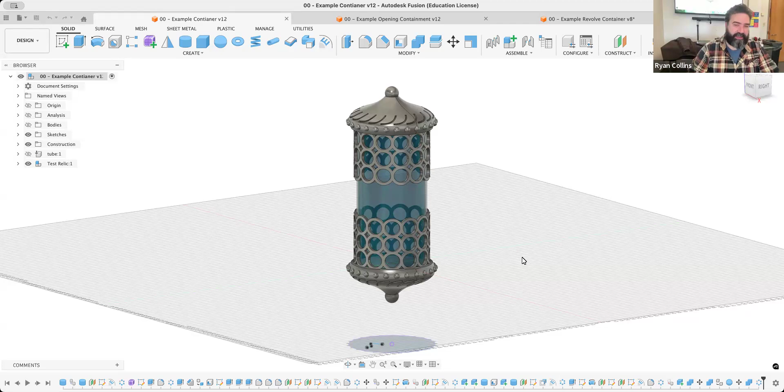And the trick is we want them to 3D print as functional objects, both as there will be some kind of a moving component to this, but also your printed version has to interlock with the provided actual bit of acrylic tube. And one of the main things that comes into play is clearances.

We talked a little bit about it before, but the difference between, say, modeling something and then machining it with actual cutting tools, like machining something with a lathe, a mill, whatever, some sort of actual metal machining, you can actually keep extremely high tolerances. You can also kind of let it slack, but you can keep very high tolerances.

When it comes to 3D printing, yes, you can also do that too, but there's things to be aware of and compensate for. The main thing is when you're 3D printing with a filament printer, as we're going to be printing the bulk of these, it takes your model and what's called extruding it. It extrudes it because the actual printing head basically is like a hot glue gun that's on a computer controlled arm.

So what happens when you use hot glue and you try to run it down on a piece of paper or something like that? It's not like it stays exactly put. It kind of squishes down. And that's exactly what happens with 3D printing.

So you cannot keep a 0.05 millimeter tolerance with a 3D printer, at least a filament printer. I say this because there are others, of course, the resin printers can be much higher toleranced. But you have to compensate for some things. And essentially, all you have to do is just open up your container a little bit, usually in the range of at least 0.1 or 0.15 millimeters spacing. And that's just to help give a little bit more.

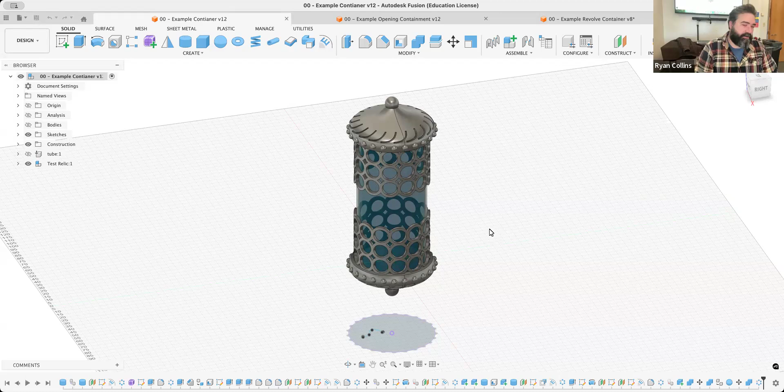Now, at most, depending on the fidelity of your printer, 0.5 is a lot to give extra spacing, but it's not unheard of. The ones we're using are pretty well dialed in, but what I mean by that is, all right, something like this. We have our acrylic tube designed, and we took proper dimensions for this, and we know that is exactly the size of the acrylic tube. That is already made. That is something we can count on.

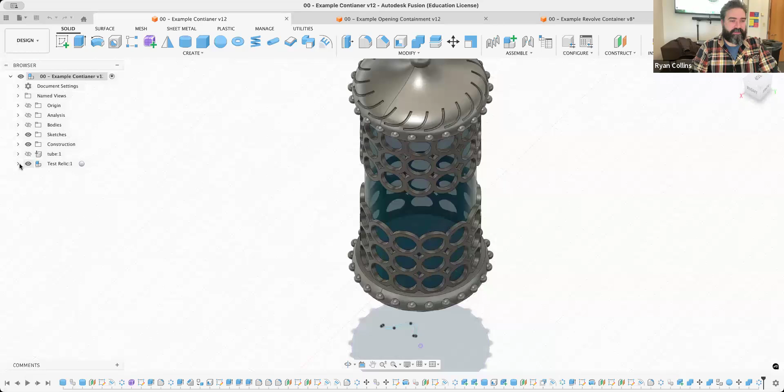But how does that work in here? Now, with this model, what we did is, I'll just hide one of the parts here, we modeled these rings and things directly off of this cylinder. So that means it would be an exact fit. Great, except we have to account for that little bit of squish that occurs. So what that means is I need to essentially just widen this area a smidge.

So to double check, what is the diameter of our tube here? It's right on 50 millimeters. Okay. Now, again, we were getting some pretty exacting, but you never know. Sometimes upwards of even half a millimeter size difference, because the acrylic tubing is not designed for machine tolerances. It's designed for plug and play tubing. The tubes we're using are actually built for dust collection things, so it will plug into PVC pipes and things like that.

So it's not meant to be ultra high tolerance, because the glues that are used take up some space and then they kind of fuse the materials together. Yada, yada, yada. Material science. Don't really need to get into that. But okay, well, I built this design directly off of this tube. How would I compensate for that?

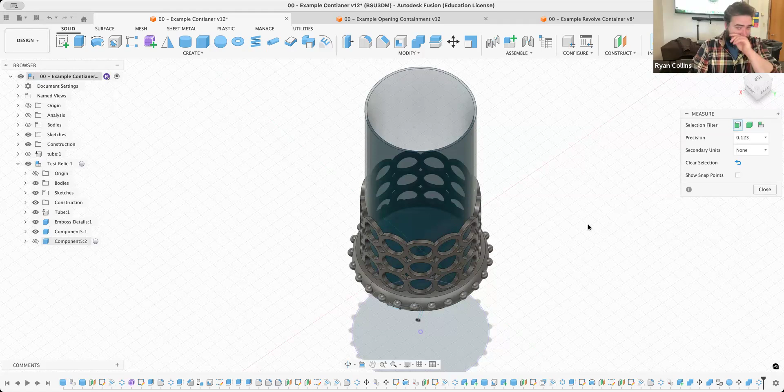Well, there's a few different ways. One, if you're building something, you can just intentionally build something a little bit larger, add in that little bit. But with something like this, I need to actually have a teeny bit of a gap between the wall of this acrylic tube and the wall of this model. And right now I've modeled them as exacting. Okay, well, that's actually pretty easy to fix.

All we have to do on this one is, well, if I already used an extrude to cut this whole thing away, why not just do exactly that? So what we can do from here is a simple additional cylinder.

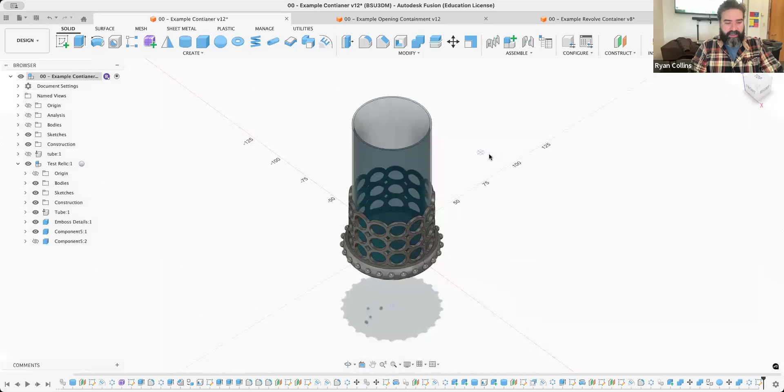Maybe here. Actually, probably would have worked better up top, so let me cancel that. Additional cylinder. We'll use this top edge of the tube as a plane. As you mouse over to the center, we get the concentric circle symbol. Let me see if I can change color. Nope, that doesn't help at all. My circle is blue, and a blue background does not help.

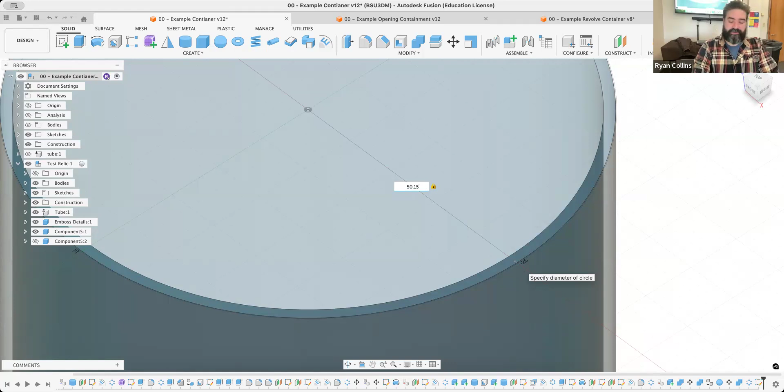So right there, and we can take this out to, well, 50 is the already designated size. But it wouldn't hurt to add in just a teeny bit more. So we could make this cylinder, this circle, 50 point, let's just say 15, so it's a teeny bit larger. Okay, that can become our cutting tool. Probably should have just used this as a sketch, but here we are.

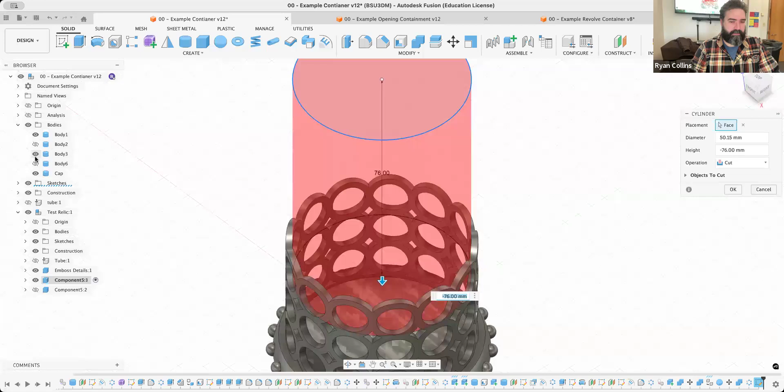While I'm going to do this, let's hide that tube component. And this would be me using this as a cutting tool. I can just, oh, somehow did I accidentally create this on there? Ah, there we are. Double forgetting where I actually built things. And of course, there's other elements that are somewhere. Anyhow, so I can drag this cylinder down. Now, unfortunately, I'm accidentally getting an additional part in here. Let me just hide some things. There we are. Much better.

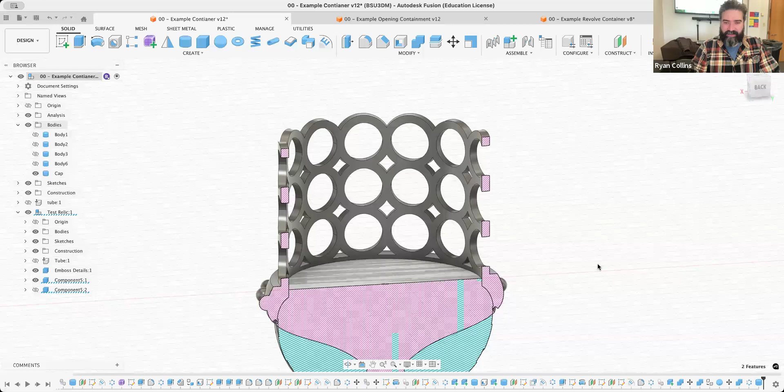And all this is doing, you can see as I cut down, I'm just making a tiny slice more. So let me only take this about halfway, and I'll use the section analysis to let you see what I'm doing here. I hit OK. Turn my section analysis back on that I already have created. And I can't actually see what I'm doing. So let's go back and edit that. There we are. It creates a line, but there we are. Just trying to get this in alignment.

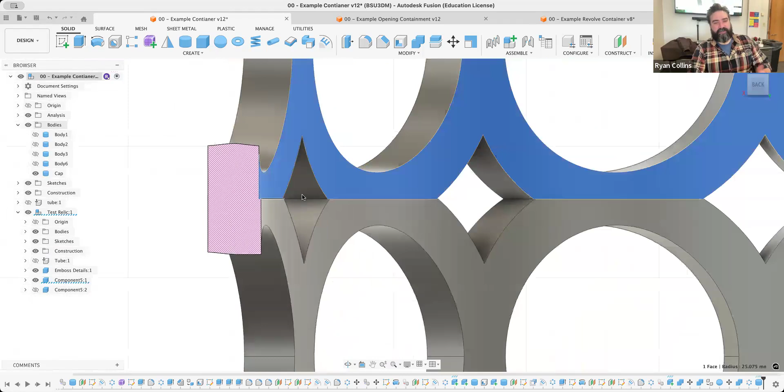Hit OK for that. And as I zoom in, you can see the difference. The original line down here and this slightly wider line cut has just this little tiny step. That's all I need to do. So take that extrusion or that cylinder all the way, oh, too much zoom out, all the way down. I was just doing the partial so you could see. So take this all the way down to the actual designed end.

And now when I unhide my tube, oh, wrong one. Where's the one that I'm actually using? There we are. You can see that I have just a tiny gap, and that's okay. Having a little extra gap compensates for any squish that occurs, any slight deviation in the plastic material that gets extruded from the 3D printer, and gives you a little bit more wriggle room. Ultimately, these are going to get glued together, so it's not like we have to keep absolute press fit tolerance.

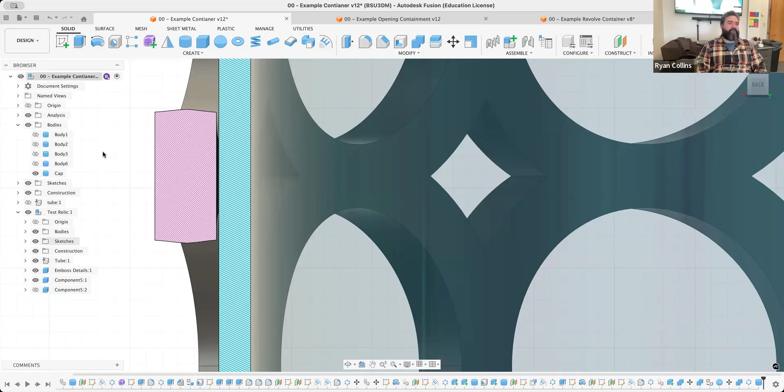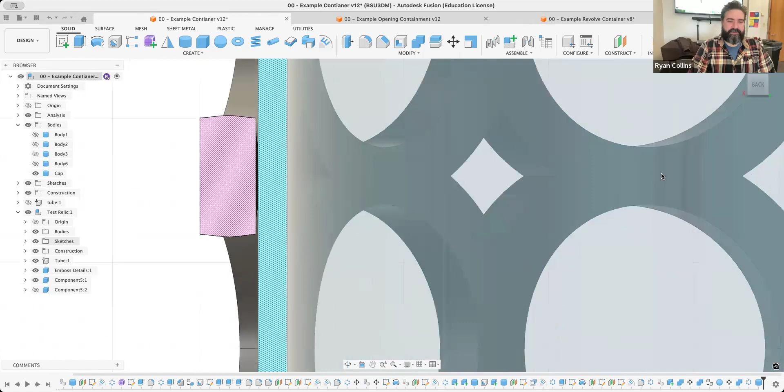Press fit tolerance refers to something that does not need glue. It pushes together and it's made so tightly that the friction from the two different sides keeps it installed together. We don't need that. So I used 0.15 millimeter larger than the tube in this case. That's probably a good amount. 0.1 to 0.15, and I will type that out in the notes, is usually a good size extra to use if you need to install a 3D printed part against a prefabricated object you have already taken dimensions from. So that's a really effective way to add some dimension to it.

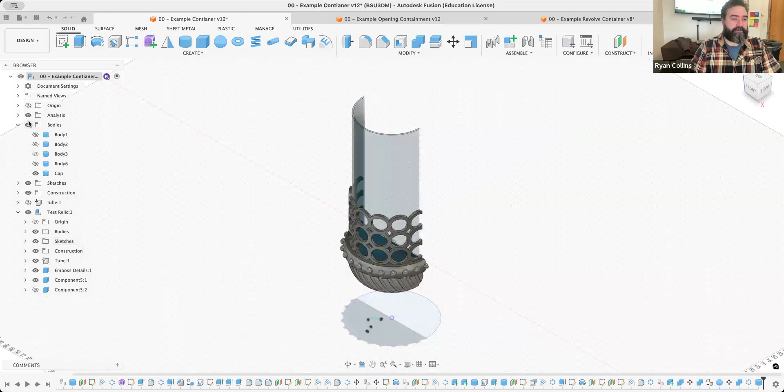So, all right, great. I have my part that's already cut. Let me turn off section analysis. So how do I now take this out for 3D printing? Well, something like this, we probably don't need to do anything more to it than what it already is. It's just this whole design here, as this whole body, it'll be taken out as one solid object. Cool, that's fine. Obviously, the actual tube does not need to be printed because that is a physical object already existing. So with this model, I'd use two of these.

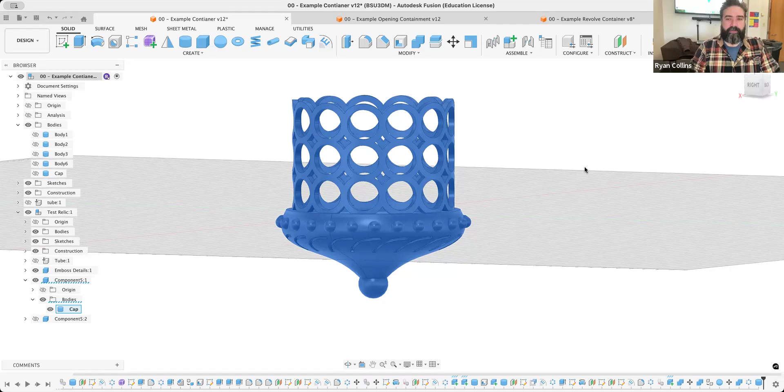And since I have the two, and I've already adjusted this one, I could just take this one out and print it twice. I don't necessarily need to make the adjustment to both of them. It definitely makes sense, and in your case, for your models, definitely do it to both models. But if you're making and printing this yourself, you would know that I don't use the top one, use the bottom one. That's the one that's adjusted. That's what I mean. But for your case, please, yes, do make the cut, make the adjustment to both sides so I know that they're both done. All right, great. That's one. What about a more complex one?

My alien coffee pot. I can't not see a coffee pot on this.

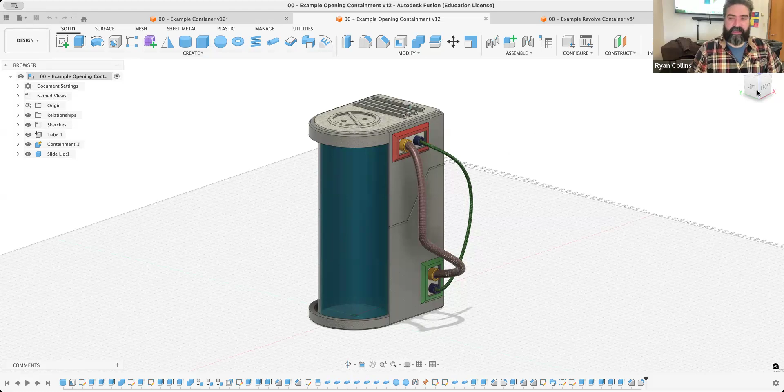Well, one of the things we talked about was printing or modeling to print as separate objects. Now that reliquary with the two caps, yeah, you're printing the two caps. That makes sense. But this one, because it does in fact have to have some kind of opening function, how would you create that?

Well, one of the parts on this is the lid that opens, which is literally already a part, meaning it's flat on the bottom. Let me do a color shift mode so you can see it more clearly. That's just a flat object. Great, this top flat object. But this also has all of these little funky bits to it.

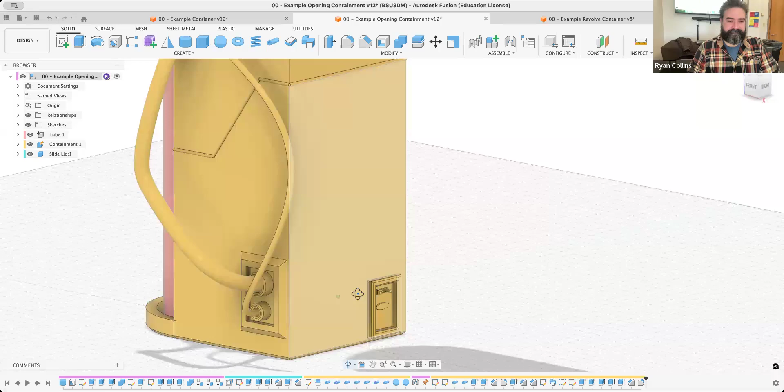So sometimes printing an object that's this complex, you would need to break it up intentionally. So with this, I talked a little bit about before, but something like with these pipes and things, do not connect those, do not join those. Leave those as separate bodies entirely.

Because the benefit here is I modeled this just with these openings, and just like with the cylinder before, this tube could just slip right in and be glued in place. No problem there. Now, there will be a minor issue in that I need to adjust this slightly because you can see it doesn't line up quite perfectly, and it's slightly too large for the hole.

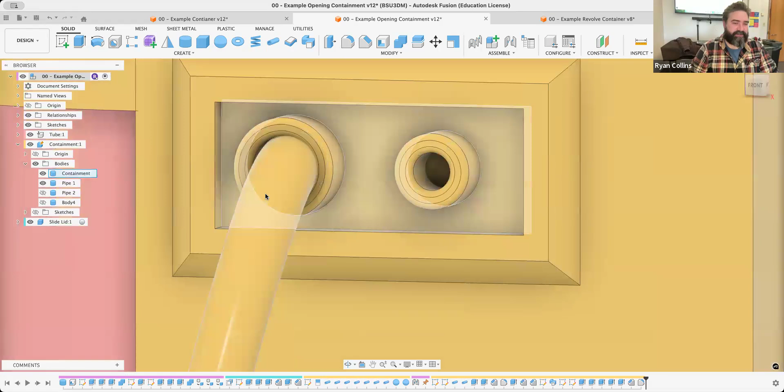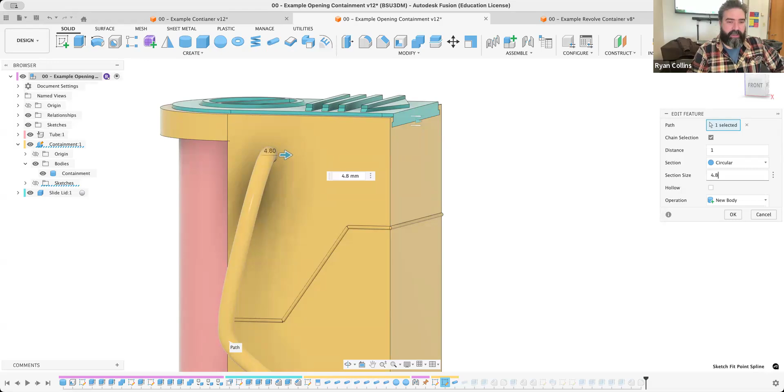So there's no harm in taking that pipe tool. Where does that occur down here? There we are, edit feature. All right, it's currently 5 millimeters wide. Maybe I should bump that down to like 4.8. It's a minor change, but it's going to leave me just a tiny bit more gap for installing right there.

So leave yourself a tiny bit of wiggle room, 0.1 to 0.2 millimeters on something like that. Probably not a bad thing. It's not really going to make a big difference in the long run, but consider things like that. But that's all well and good. But what about the whole thing as a whole?

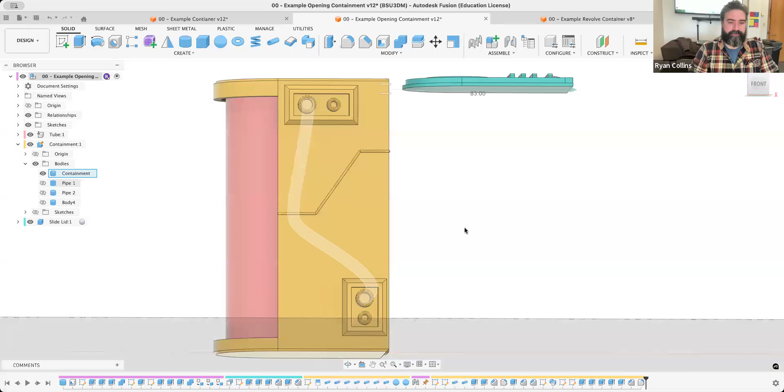Well, same deal here. This tube currently is an exact fit for the shell around it, or vice versa. The shell around it is an exact fit for that tube. Exact. So I would probably need to go ahead and do the same thing as I just did, as in, let's activate that component.

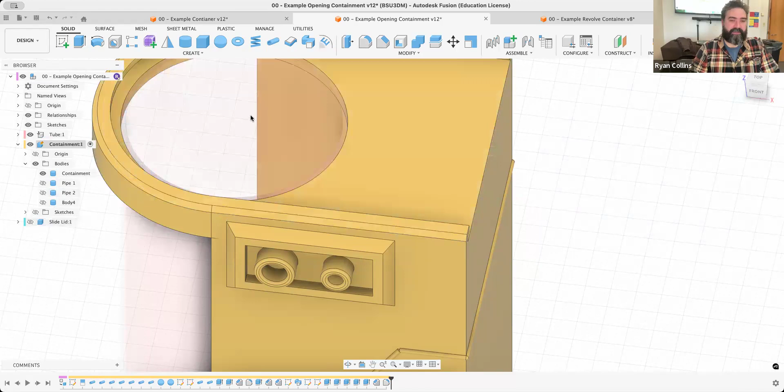Let's say create a cylinder on top of that tube. Capture. It's just asking me, do I want to leave the lid out there? Actually, I should probably undo that. Yep, let's revert the position and then I'll just hide that lid. That makes it easier. So creating a cylinder at the top of that open tube, just like it did before.

What is the current size? That is 44 millimeters. So let's say 44.15, just a tiny bit larger. It's going to help. Might not even be a bad idea since this is more complicated or larger here, and it might not even be bad to bump that up even more, to like 44.2. It's all going to get glued together, so it's okay.

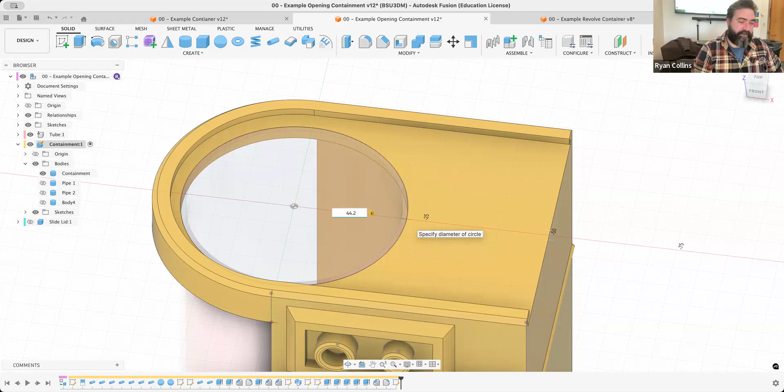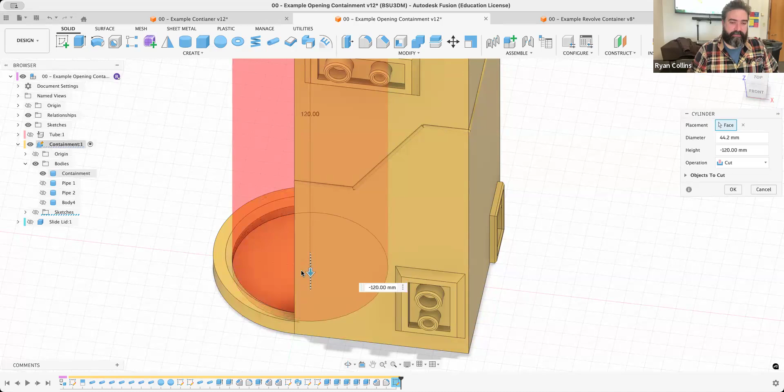Taking this all the way down will let me cut through just ever so slightly. Don't forget to hide your acrylic tube because you don't want it cutting that away and deleting it. Cool, there we are. So to that effect, it cuts it ever so slightly more. So now when I unhide that tube and zoom in, you can see I just have a little bit of a gap there. Good, that helps a lot.

But what about this whole thing here? Because when it comes time to print, I'm going to go ahead and let me save this. Widen tube—I know I didn't spell widen correctly. Leave me alone. Let's go ahead and 3D export to 3D print this.

So I'm just exporting it. That's fine, 3MF, whatever. Go into downloads. Good. So I'm going to change over to the actual slicer program and show you what's going to happen with this.

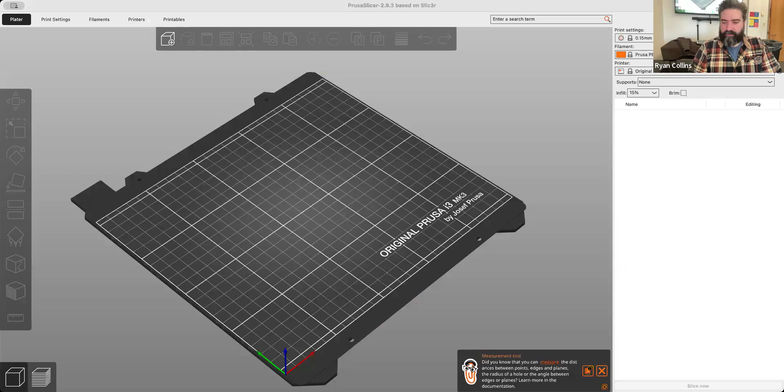Where is my downloads? There we are. Drag and drop into there. All right, seems a lot larger, but it's actually quite small.

Look, just as it exactly is, and don't worry about this part. I'm just changing the fidelity of it. Let me go ahead and slice that.

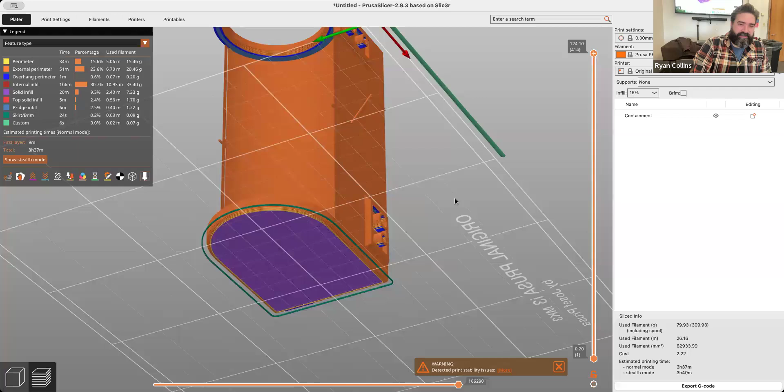I'm getting an error, what's called an overhang perimeter, because I cannot print in zero gravity. Gravity is a thing that exists. So I'm going to have to create supports to support this overhang.

So I can go ahead and let it create supports. Let's just say supports everywhere because I'll need it that way. If I slice, this turns the whole thing into an entirely different support setup. And look at the time, it takes 9.5 hours to print this thing.

And that's all support. So one of the few things I could do is figure out a way to print this on its side, which actually makes a lot of sense.

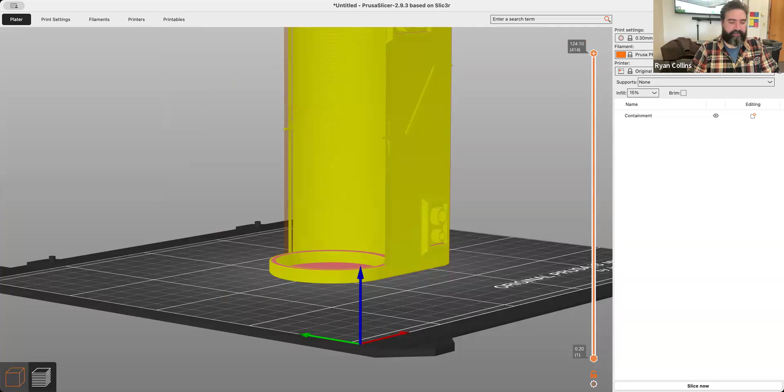So let's take this object and I'll try printing it on its side, out in front. Let's just see what happens that way. And I'll have to do supports everywhere also.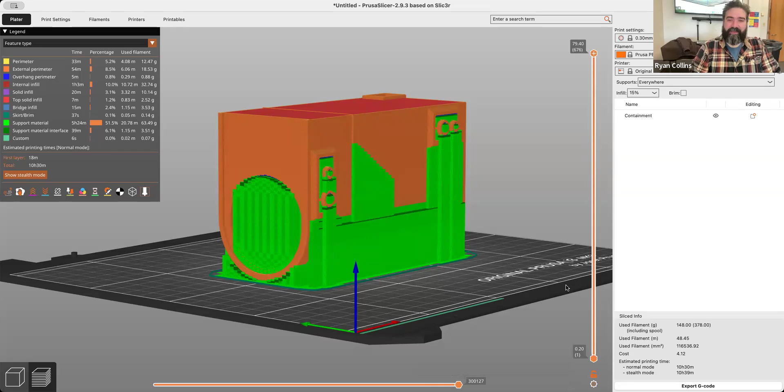Okay, that made it a lot worse. It's 10 hours now. I don't know why this is being so very sensitive, but we can do things like slicing this model apart.

What I mean by that is, let me change to no supports and see what it would take to print. If I didn't have to have supports, 3.5 hours or almost 4 hours.

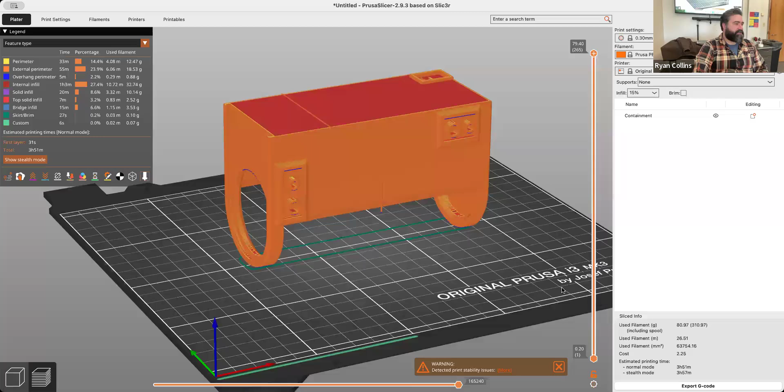Way better. Now that sounds like a really long time. It's not because you're using a huge amount of material, it's just that it takes that long to put that amount of information down.

Well, why wouldn't it make sense to put it on the backside here? Well, it might. So let's try that side overall, try slicing it that way.

All right, that actually printed about the same. Problem is now I'm going to have this weird stepped backing here. You can see how it steps up and up and up, and these lines aren't just there because it looks weird.

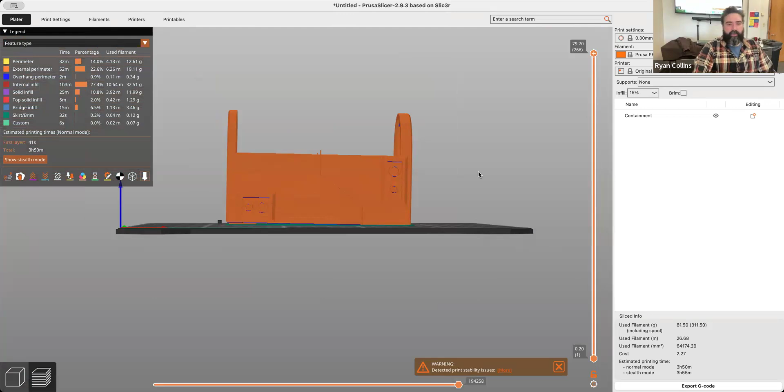That's the slicer taking your 3D model and slicing it into layers. So I'm going to have to compensate for that somehow, and one of the easiest ways is to literally chop your model in half. That can work pretty easily.

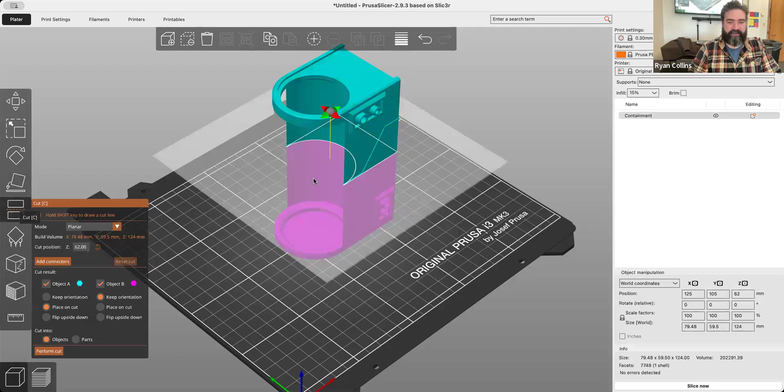The good thing is you can actually do that in a slicer program. Let me do this, and let's say I want to actually cut this thing right in half, right where it's saying.

We'll say slice that... oops, I didn't mean to hit slice now. Yep, go ahead and cut it. Cool, perform cut. That literally chopped my model in half.

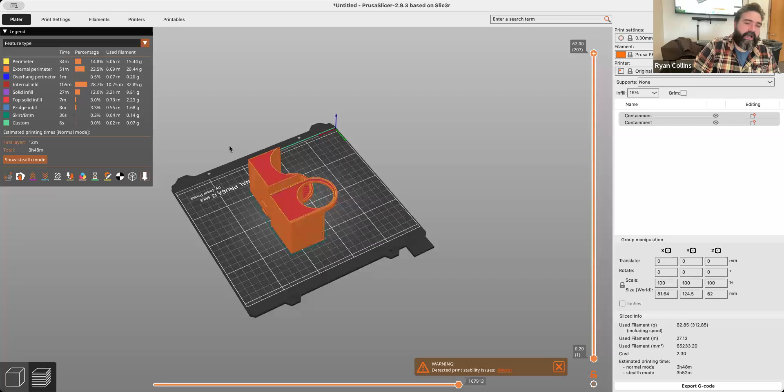The problem with doing this, and I can now move these around, I'm still going to have to make some supports, blah blah blah. But the problem with something like this is I'm going to have to figure out a way to glue these back together and not get them out of alignment.

So when it comes time to some of your models, what you can do is if you know you're going to have to cut something in half to make it print better, or if it's in several pieces, make it so it's intentionally broken apart and can be realigned with what's called registration keys.

So let me go back over to Fusion, and I'll just give you a really simple example of what I'm talking about. I'll talk about that one in a few.

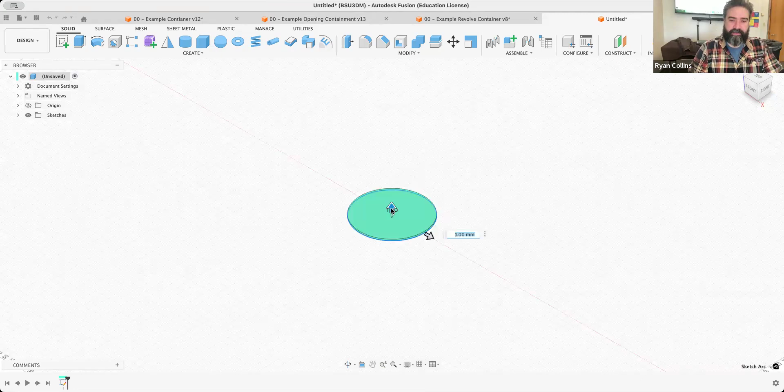So let's just say I have this, sure, a cylinder, whatever, doesn't matter. Let's just make this like 50 millimeters wide and so tall. Cool, but I know I'm gonna need, and here, tell you what, just so you have something to align to.

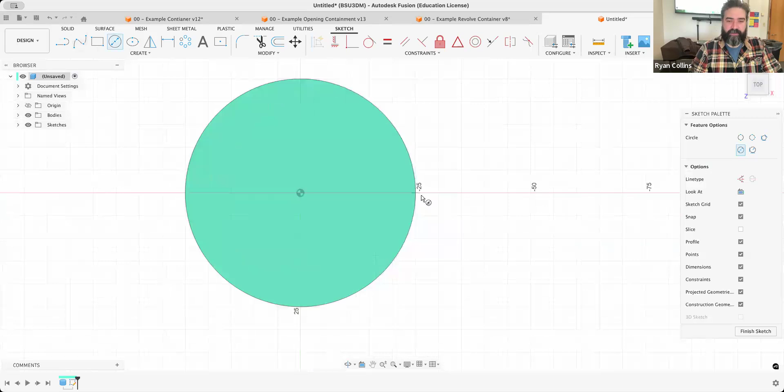So you can kind of see what I'm doing here, let me just throw a little notch in it so you can see so I don't get out of alignment. Literally does not matter. I'm just making that to extrude that shape down.

Let's do to object, to the bottom. All right, I just made a little notch just so you can see, just so you can get a little bit of a reference here. Okay, so say I know that I'm going to need to cut this in half.

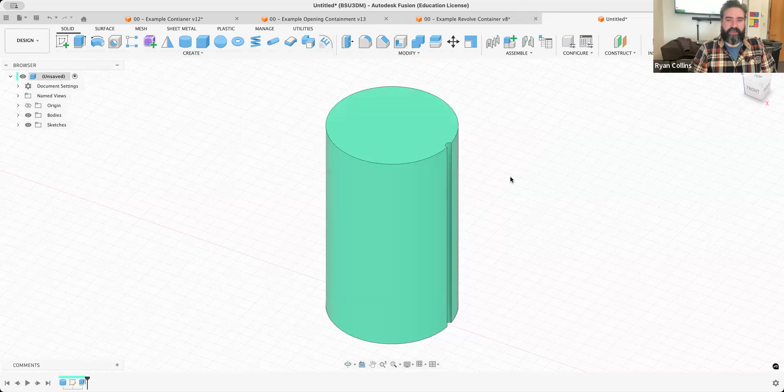All right, well then let's do exactly that. We'll use a construction plane just because I don't feel like drawing a line. We'll go an amount up, it doesn't matter in this case.

And we'll use that line to split the body. Let's use that construction plane as our cutting tool. So now I have two bodies, top and bottom.

Well, I need to make sure that these will stay locked in place. There's different ways of doing this, and some people choose different things. What a lot of people like to do on the top here is use a sphere. Let's just do one, and make that 10.

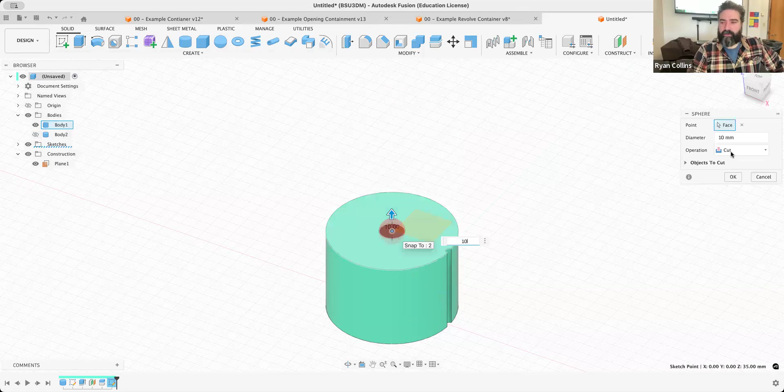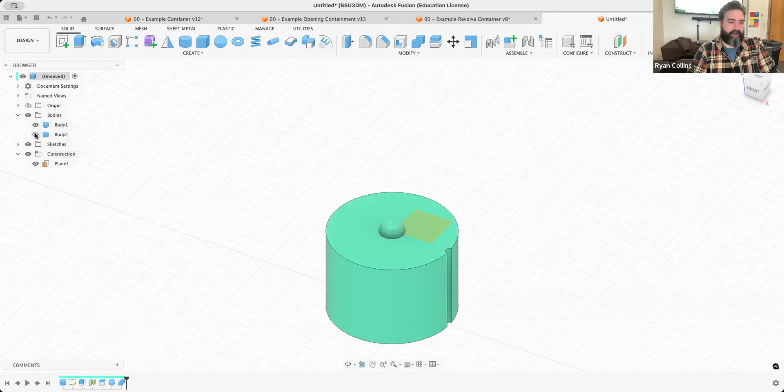We'll do a join, and then for the top we could do a combine cut. Target body is the top, tool body is the bottom. Make sure we save our tools and do a cut. I only did that so now the bottom has a little sphere, and we open up the top, it's got this little key called a registration key.

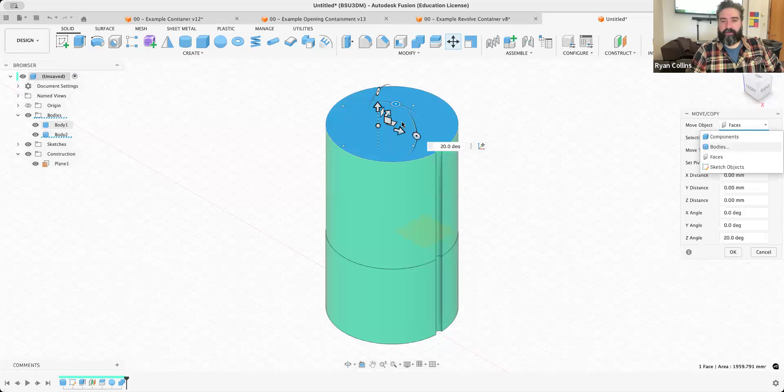Now when I put them back together and glue them, they're not going to slide, but they could very easily rotate out of position because that's just a sphere.

So what I found is a much better solution, and let me just undo the little sphere there, is instead something like a square or triangle, some kind of polygon. I'm going to draw on here in the center, because I can use a center point, and make something like, let's just say 8 by 8. Make it a square. That's literally all I have to do.

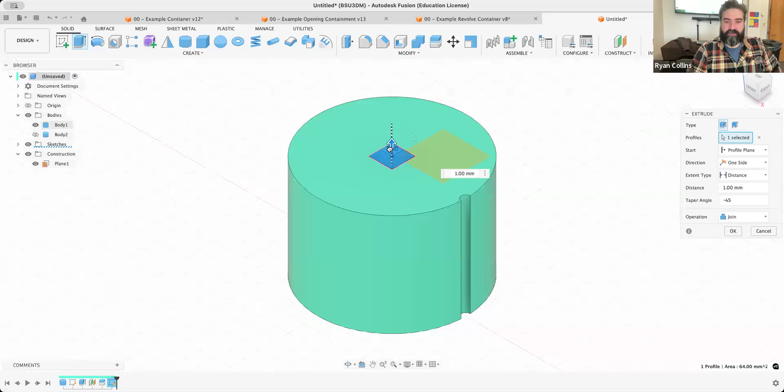A little square there. I'm going to extrude that square up, let's say 5 millimeters, and put a taper on it, let's say 45, just because why not. And 5 millimeters is way too much, so maybe I need to make it less. There's a little notch there, a little square notch.

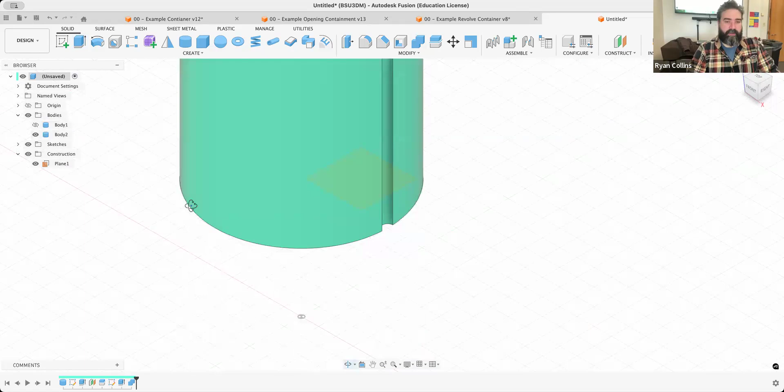Now do exactly what I just did before. I'm just going to do a combine cut, target body on the top, tool body is the tools on the bottom, make sure I save the tools. So now I have a little square protrusion on the bottom and a little square notch on the top. So now when I glue those back together with super glue, they're going to stay in the correct position and they cannot twist either.

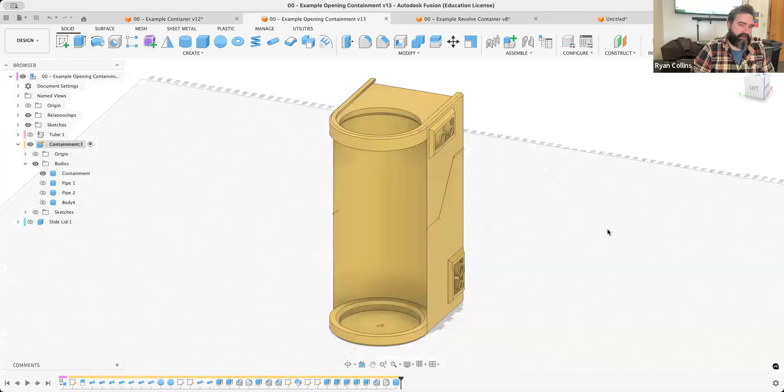Sometimes not twisting is important, like if I had to cut this object apart, it's important that it doesn't twist and stays in alignment. But if it's something like the first model and I just had to make sure I wasn't losing parts, who cares, the whole thing rotates anyway because they're not necessarily aligned. Or if it is important that the patterns stay aligned, you can probably eyeball it pretty close and it won't be a big deal.

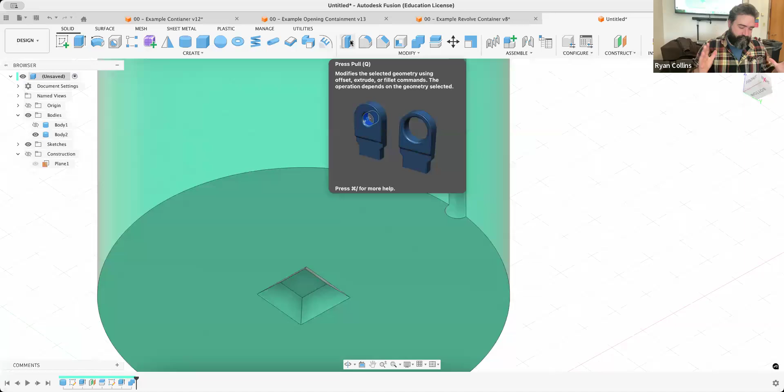But the other thing is, like I was saying, you want to account for a little bit of squish. So what I often do on my own models is use a press pull, which is just like an offset. I'll go in on these faces, probably all of them, no harm in making the top a little bit larger too. Let's do what we just did, make it like 0.15, negative, so it goes outward, just a tiny bit larger.

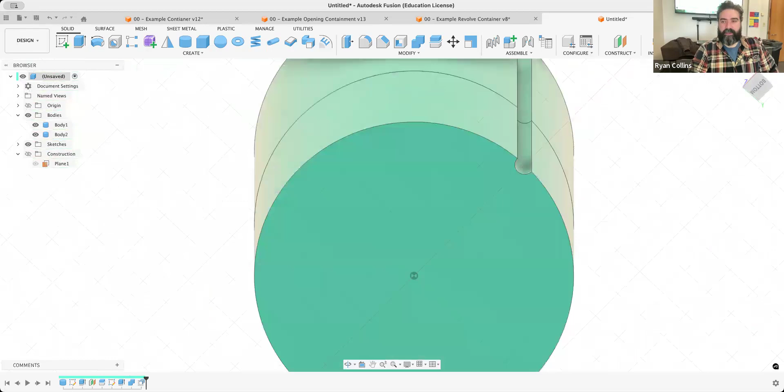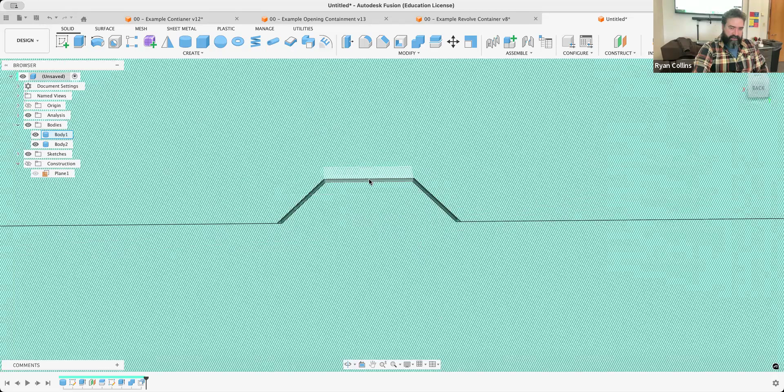Now I'll do a section analysis so you can see what I'm doing here. When I look around, you can see there's just a tiny bit of gap there, and that'll account for any squish, giving you a little bit of space on top. It helps you with alignment with glue and things too. The 0.15, if you find that's too big, make it a little bit smaller. But those are some really simple ways of building something that needs to stay in alignment.

Now, some of you have models with additional, multiple components that need to come together, so I figured I would do a quick reference on something like that too. Let me make a quick square here. Actually, let's start with a sketch instead, I think that'll be faster.

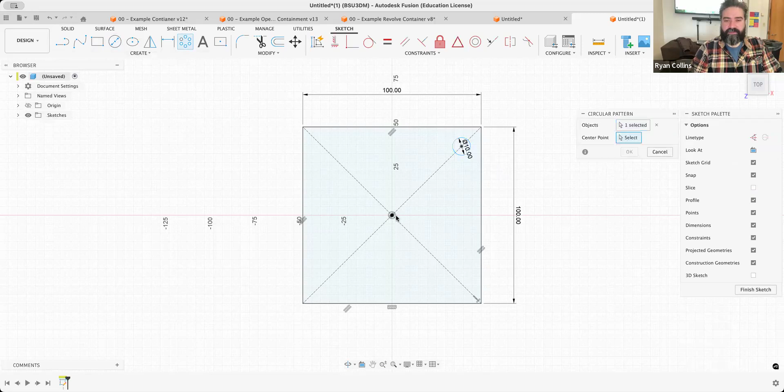So I'll do a center point square. I don't know, let's just say 100 by 100. Doesn't matter. And then some of you have like poles, and let's say that's 10. Great. And I'll do a circle pattern of that around the center point. I need 4 of them. Those all align directly. Great.

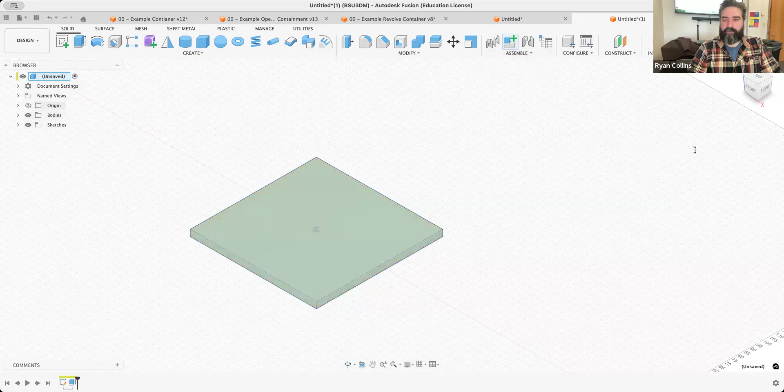Okay. So I'll do an extrude of what will become a base and also a bottom, but let's just say -5 just because I'm going to go that way. Great. And then just to help, I will new component poles. So now when I go and extrude those poles, they will come off as separate objects entirely. And let's just say, I don't know. Oh, not 1,000, that's way too many. Let's just say 100 again. New bodies entirely. Great. Okay.

So how do I keep this sort of thing in alignment? Actually, works really well, pretty much the same thing. So let me just real quick also have a top. Might as well use that sketch. Ugh, should be getting those. No, I didn't want to make a sketch. Dang it. I will often mix up those sketches and extrudes.

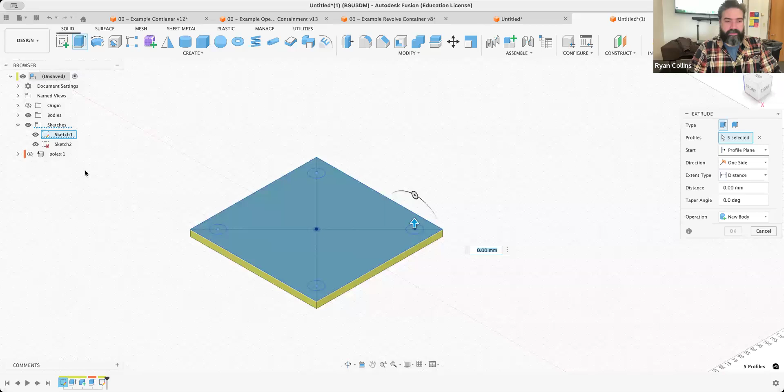All right, the whole thing. Start not at the profile plane, but at the object. And then again, I don't know, like I did like 5 millimeters. That's fine. Nope, I don't want it on that one. I want it up there. Perfect. There we go. Okay.

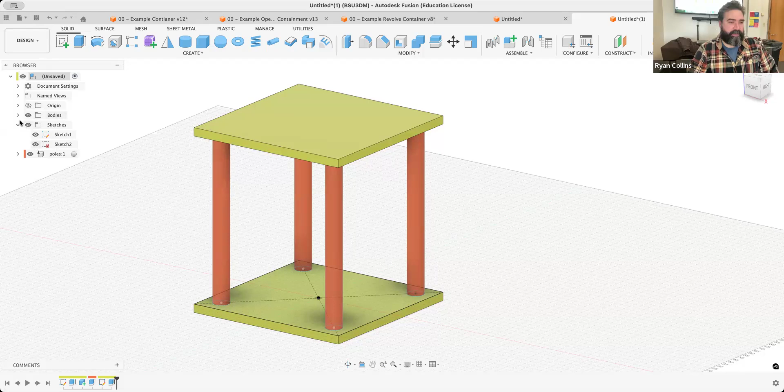How do I assemble all of this and keep it all in alignment? Well, it makes perfect sense. These top and bottom are all flat. Yep, sure, great, makes sense. But how do I keep all this stuff from twisting and aligning? Well, some of this is just going to be like really careful. But honestly, easy thing here would be, all right, let's do what I just did here. As in, let me hide the top and let's do an extrude on top of these.

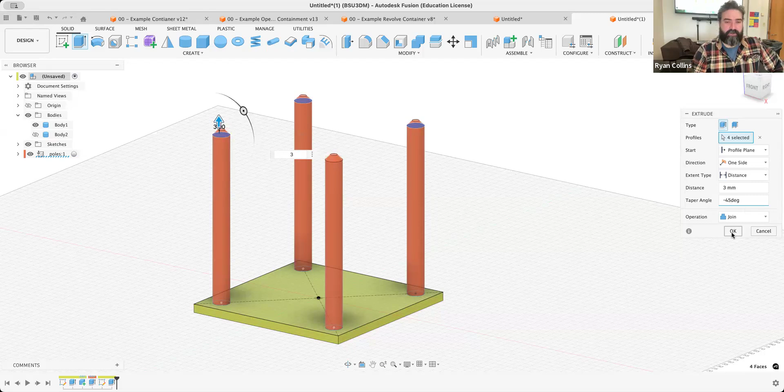And let's say, I don't know, a 3, and I'll do a negative taper of, I don't know, -60. I am absolutely just picking numbers out of nowhere. I could say 45, cool, great. Join that. So now this is slightly taller, and it absolutely will go into the body of the top here. So, all right, let's do that. A combine cut. I need the target body there. Tool bodies are all the poles. Keep the tools. Great. So now when I hide the poles, I now have those same little divots in there.

And I can use a round because it does not matter at all that these poles twist in their spot. I'm gluing them in place. If they twist, who cares? Now, if you have to try to keep alignment, yeah, maybe use a square notch on top of that or something like that. Or just try to be really careful.

Ultimately, these are just some super simple ways you can plan for an object that you want to print, that does need to be assembled, but you can consider how it's going to be assembled afterwards. Ultimately, what we're trying to do, you keep separate parts broken up so they can be printed more simply, and then you want to be able to put them back together. Well, just put a couple little notches in there somewhere so that it's not just an immediate full slice apart, but it actually has little tabs, little notches, little registration keys is what they're called, that help keep the thing aligned while the glue sets.

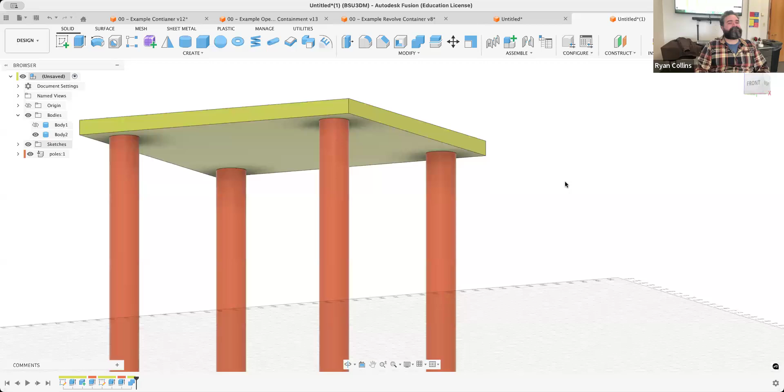So hopefully that gives you some good ideas of how you can model something to compensate for being broken apart. Otherwise, some of you are just going to be taking some parts literally apart and printing them flat. That's perfectly fine. We just talked about a few that have some doors, things like that. The quick last one I wanted to note is that, actually, instead of starting a new one, I'll just, nope, don't save, I don't care.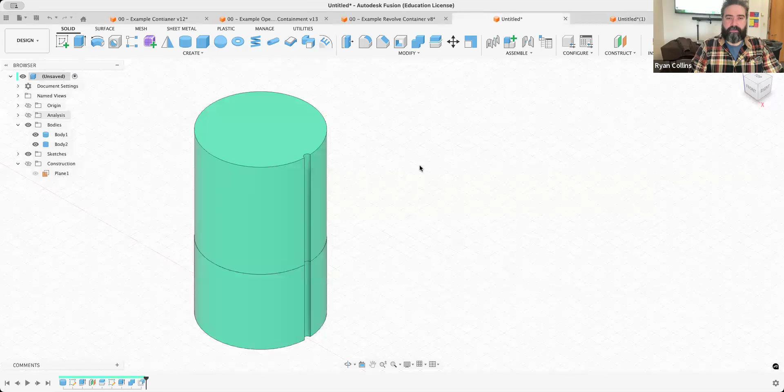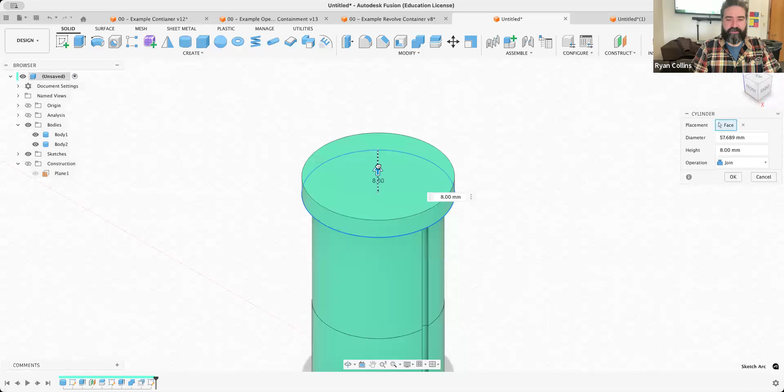There we go. I wanted to address threads real quick, just because it was asked. How do I thread something together, or are threads a problem? Yes and no. And what I mean by that is not trying to be intentionally vague, but let's just start a cylinder on top. Cool. I'll just make it a little bit larger and we'll go upwards a little bit. Neato burrito, new body, lid, hide that thing because I want to make a cylinder on the bottom. And I don't know, sure, 20.

And drag that down a little bit. Whatever. Okay. So let's say, again, we'll use that to cut target body, top, cut, cut. Yep, great. The reason I did that, I want to show you like with threads. Yeah, you could have used the hole tool, but using these, it's more precise.

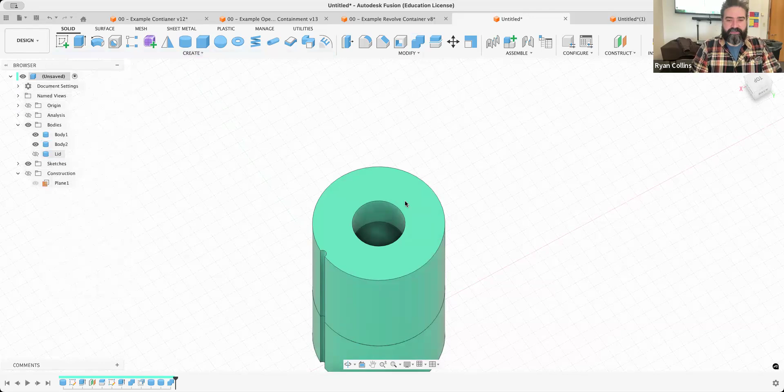So let's just install a thread on this. Measure over, sure. A default apparently has 20 at a 2.5. I want to model it because I want to see what I've got going. That'll save. Repeat the thread on there. Same deal, super duper, great.

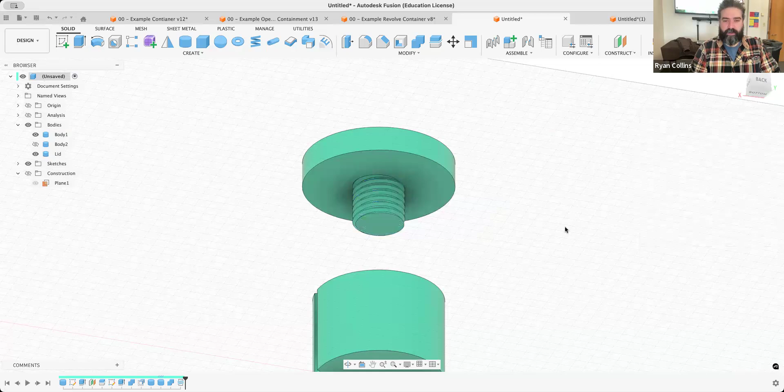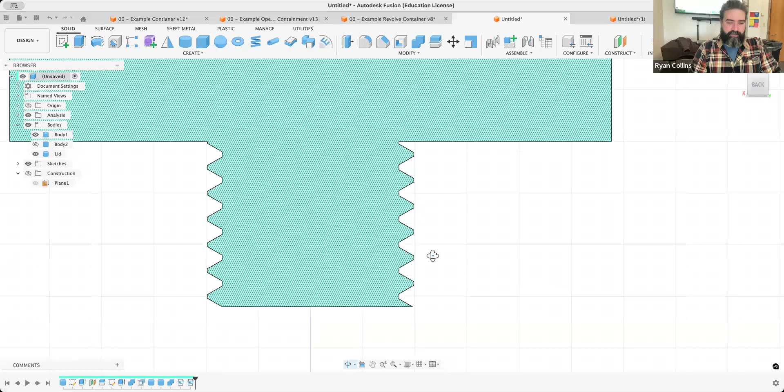So the issue is not in spacing even. You can see that fortunately this looks like it's actually lined up and it does actually compensate a bit. It gives me just a teeny bit of spacing. The issue I run into is the top and bottom of the thread. As you can see, let me hide the body there, you end up with this weird little extra bit of the threading. And you can see how it's not going to line up properly.

How I try to compensate for this is before I thread, I try to put a little chamfer on there. And let's say, I don't know, 5. That might be a bit much. 2. Sure, that seems slightly more reasonable. So I put a chamfer before the threading. Now when I recalculate, the problem is it does chamfer, but now the thread doesn't go all the way to the top. So how do you compensate for that?

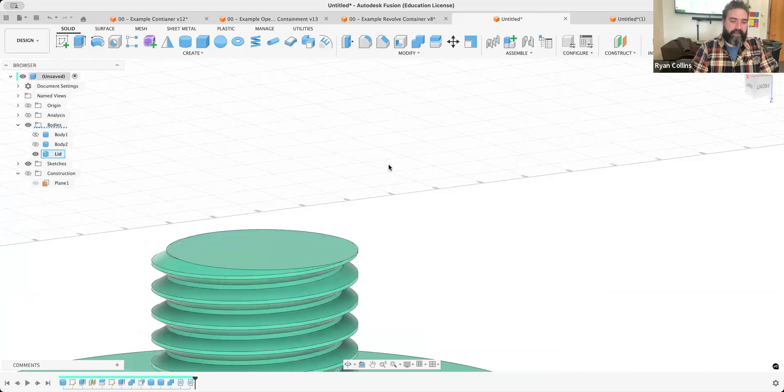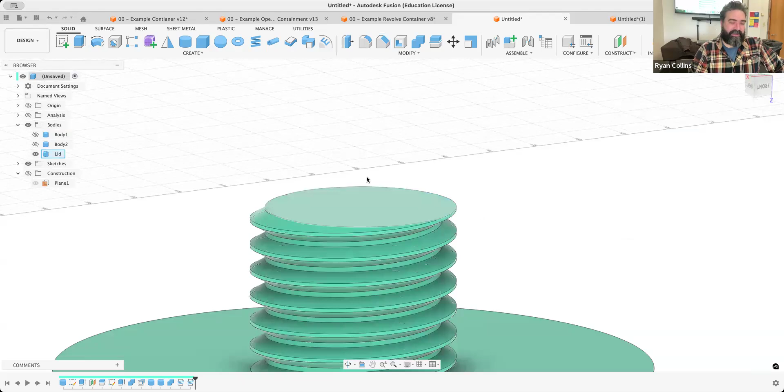Delete the chamfer. And honestly, the only ways I've really found to do anything about that to help for clearances, because you can't chamfer like here, because that's just not a thing. It gives you some super weird results. Basically I'm trying to clean the edge up. I have found really the only real way to do something like this is an unnecessarily complicated way around. And that would be to do a sweep around that. So how would I do that?

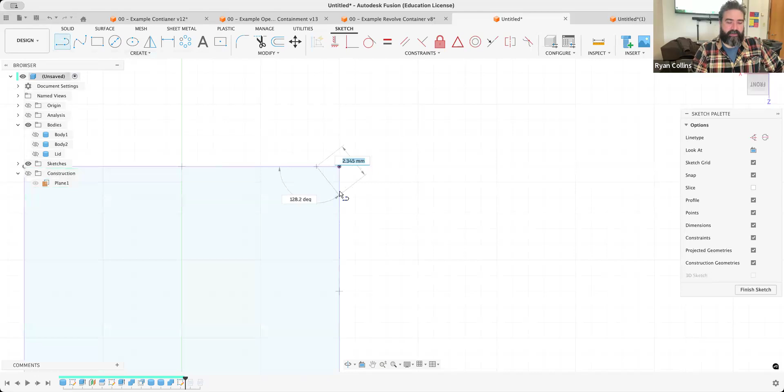Take here. So I'm just looking at it from whatever side, doesn't matter. Do a projection. And I'm just gonna make a triangle from the side there. And what I'm gonna do is, so now I can snap backward. I got my threads all there, great. And what I could do is sweep that triangle shape around the path that is the top here.

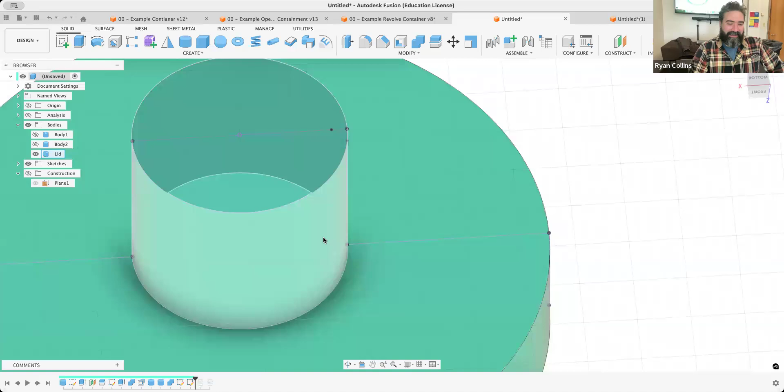Problem is, I should have had a second sketch of this circle. So let me just copy that, project that line again. Just copy that. There we go. Because see, I was trying to copy a perfect circle around that. Now, when I snap forward and I have that thread there, now I can do a sweep of, trying to grab all the parts of that corner, and sweep around the path of the circle that I made. Sure, make it a new body.

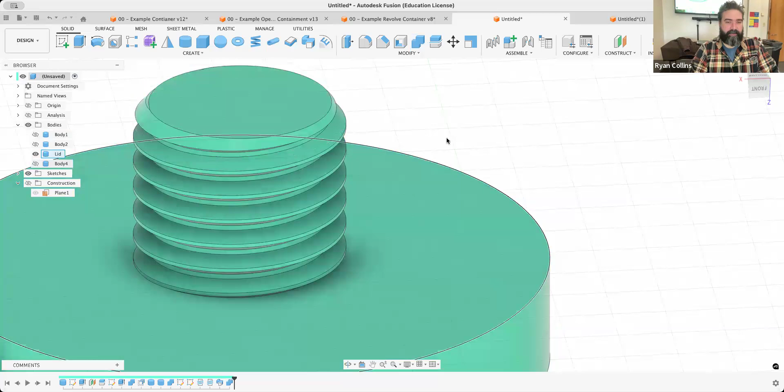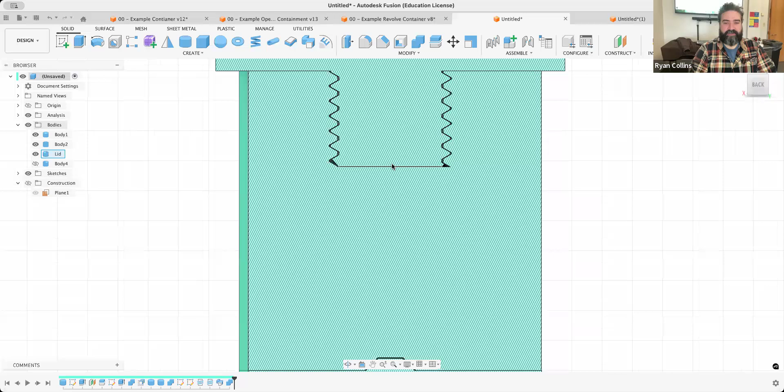And now I can use that as a cutting tool. Target, use that. Yep, cut. Don't necessarily need to keep the tools, but I can leave them there. So now I have an evenly chamfered top. It's a really overcomplicated way of working, but it does get me to where I need to be. Of course, you're not really seeing it on the side here, but a chamfer around that will just help that thread, because threads just sometimes do weird things.

The other solution can be, if you need a chamfer on that, we'll print it as it is, and then we'll literally use a file or sandpaper to sand a little bit of a chamfer onto the physical object. So don't discount the fact that everything doesn't necessarily have to be done in the modeling. If you need a little extra clearance here and there, if you could knock it out in the model, excellent. If you can't, at worst, we'll figure it out as a physically printed model, and we'll just use sandpaper or something like that.

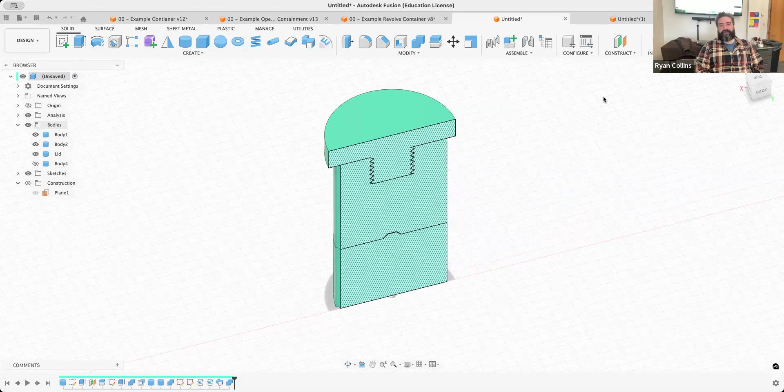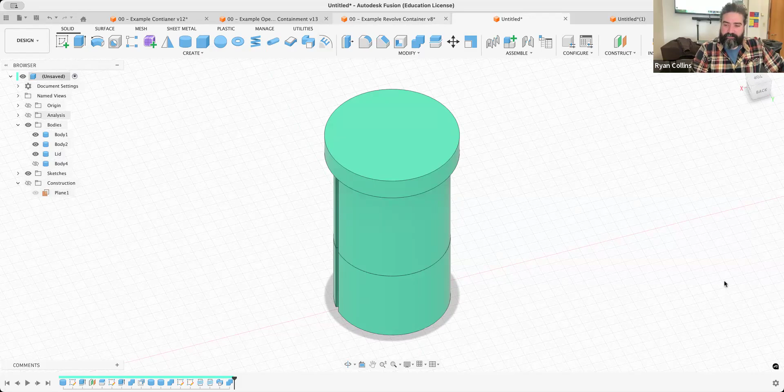So hopefully those things answer some questions, or just how do you register things together, how do you keep things locked together, and how do you actually go about gluing them back together once you want to print these and build them out from there. So hopefully that helps. And yeah, we'll figure it out from there. So good luck, and hopefully don't go too crazy with it.